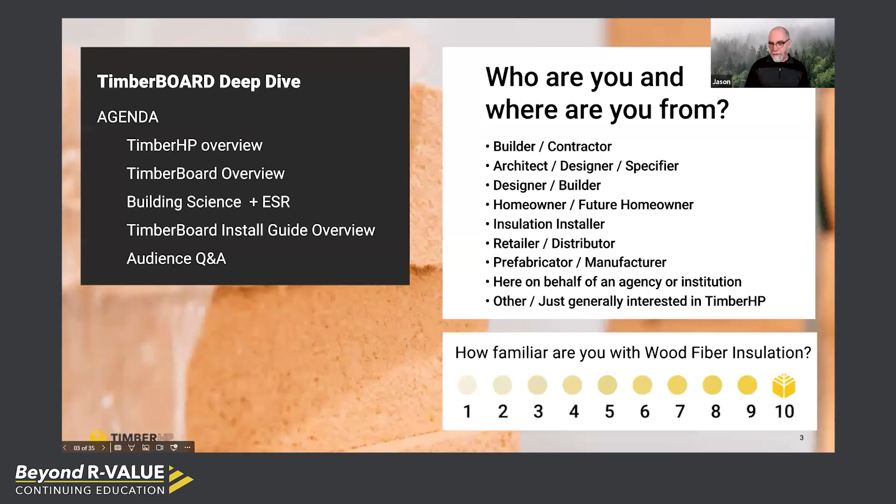Again, thanks everyone for joining us. Let's talk real quick, high level, about what TimberHP is as a company. I think a lot of you are probably familiar with us already, been following us along this ride, may, as Edith suggested, know quite a bit about our product, and welcome those questions and comments.

As we go through Timber HP, we often get asked what that HP means, and I see this as the support, the foundation, the three-legged stool of timber: high performance, healthy planet, healthy people. Any one of these could take precedent over another depending on what a specifier is looking for, but they all have equal importance to us.

It might not be the highest of our values or the strongest of our strengths, but in our eyes high performance really does represent that and more. We call this series Beyond R-Value for good reasons, and we may dabble into those beyond-R-value benefits of the product. Certainly Healthy Planet—great place to live, in my opinion, and I like to keep it that way.

So Healthy Planet to us means due diligence, responsibility, and stewardship in our materials and in how we go about building and promoting building products in the industry. And healthy people—whether that's indoor air quality concerns or durability of the building envelope—the benefits, I think, are very clear. Vapor open assemblies do a lot more for not only the assemblies but also the occupants.

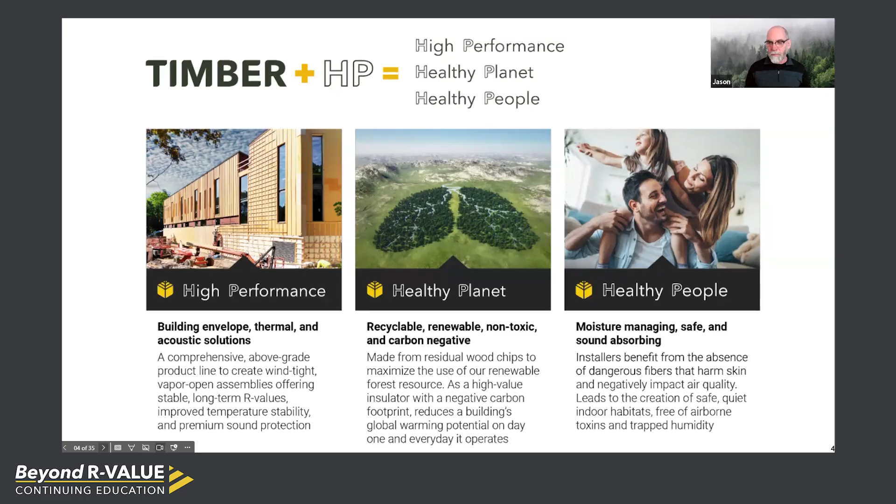So I'll get right into it. All of our product lines are based from the same raw materials. They all have an aspect that's carbon storing, high performance, and some recyclability. Not a lot of systems in place, but we do have some closed loops in our manufacturing facility to optimize the raw materials we use, and also look toward new opportunities in the field of maximizing building products, letting them roll into the next generation if that comes with deconstruction.

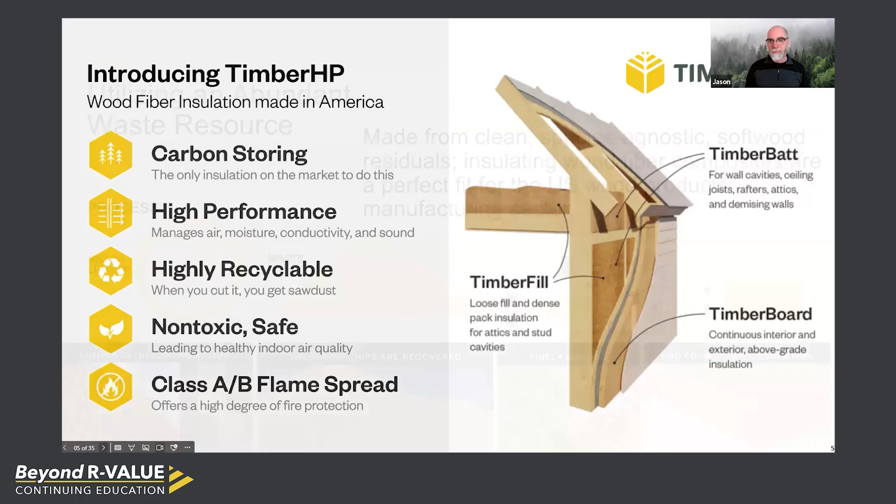Wood fiber—I mentioned the Healthy Planet, Healthy People component of this. We are primarily using residuals from another industry. We have a significant amount of that material mandated in the initial funding of this company, that we are using byproducts. We are a solid waste recovery facility, recycling facility to some degree, because we're using the material that hits the floor when you're knocking down a round log into rectangular boards.

There's a little bit that doesn't quite make the cut to the final product, and that material was a great resource for a lot of the paper industry in the great state of Maine—it was added revenue. Some have used it for biomass, but it went to paper, and we're stepping into the place that the paper void has left. We've lost a number of mills since the time we've actually been in production, and that has continued along the way.

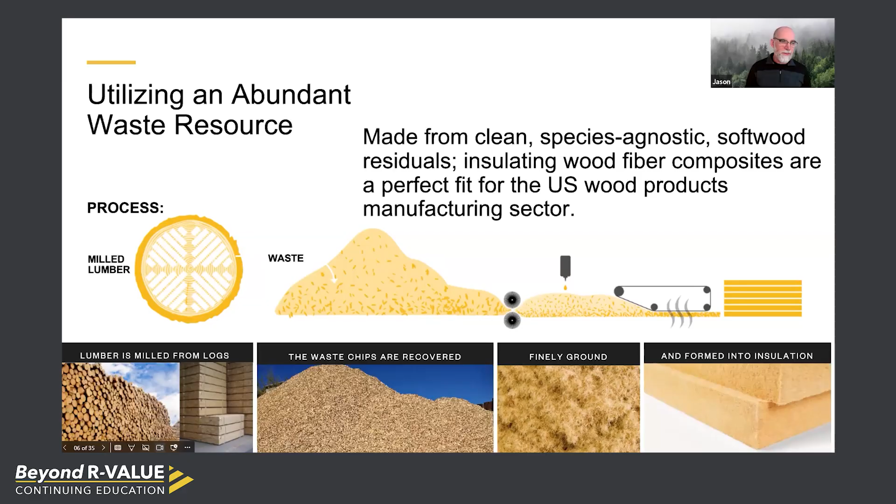But you can see the process flow here briefly—just looking at raw material, some binders, some processing, and in the end, a pretty good looking product, if you ask me. Slightly biased.

Before I pass this off to other folks on the call, just to touch on this: in our immediately addressable area, we consider wood fiber insulation—our strategy is to go to market with a price point comparable to a traditional newspaper-based cellulose product in the attic for Timber Fill, somewhere between foam and mineral wool when we talk about a board product, and somewhere between glass and mineral fiber batt when we talk about Timber Batt.

Different characteristics for each, and we'll really focus on TimberBoard on this call, and look forward to other opportunities in the future series where we get into other product lines and other points of discussion.

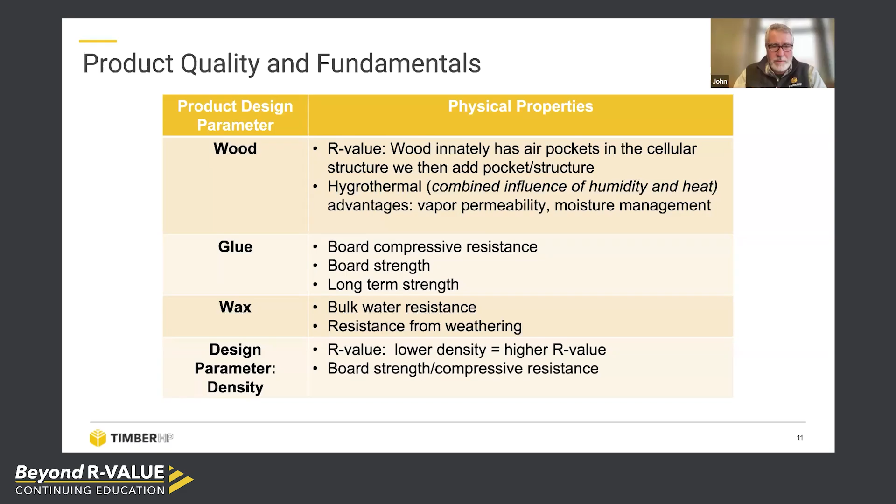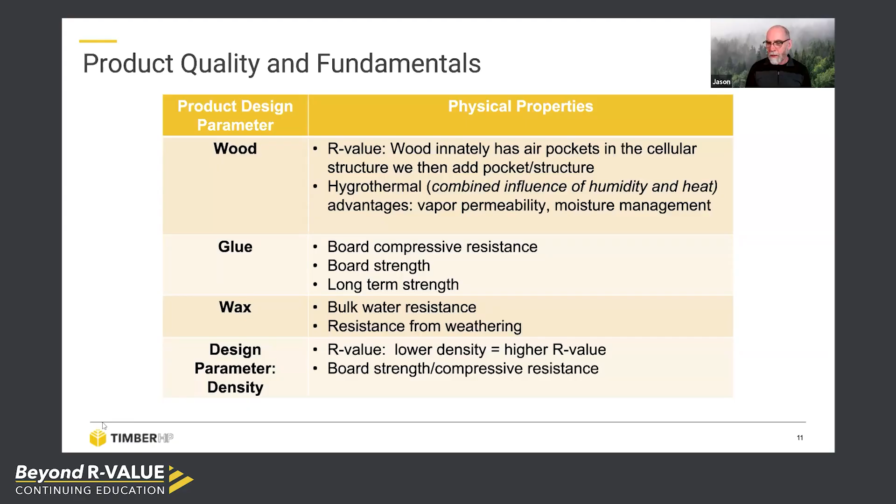I think folks may want to know a little bit more about some of the restrictions we have here. So we have an ESR, an evaluation service report, for TimberBoard, and our sizing thicknesses are 1.5 to 4 inches. But that doesn't mean that's where it ends - we do have some other thicknesses available outside of that evaluation report.

I also want to mention that bullet about the R value, which is comparable to some other products out there, certainly not the same R value as foam, but we're talking beyond R value in this presentation. It's always good to have a vapor permeable material on the outside so that when conditions allow - drier conditions outside in wintertime in this climate zone - any moisture in the assembly can dry outward and be evacuated from the wall assembly.

The high compressive strength bullet we see there is really convenient when doing vertical strapping or any kind of strapping on the outside of the building - it won't compress if you're overdriving the screw, and therefore it'll be easier to attach your cladding in a plumb, clean condition.

I think a lot of people on this chat. Go ahead, Jason, did you want to jump in?

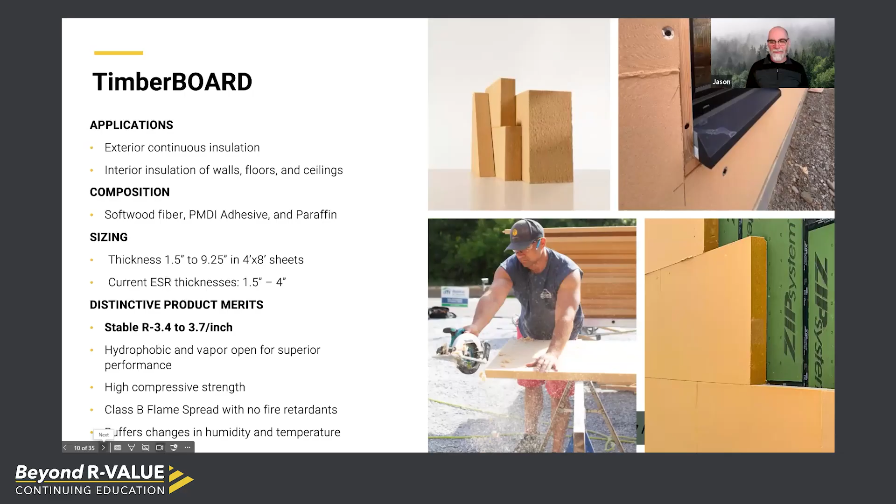No, continue please. I saw my friend Greg Smith in the chat, patiently waiting for Class A. That is in the cards this year, but right now the material is Class B rated and therefore appropriate for Type 5A construction - that's just with the board. Our other two products are Class A rated and can fill the void in cavity insulation and also for sound attenuation.

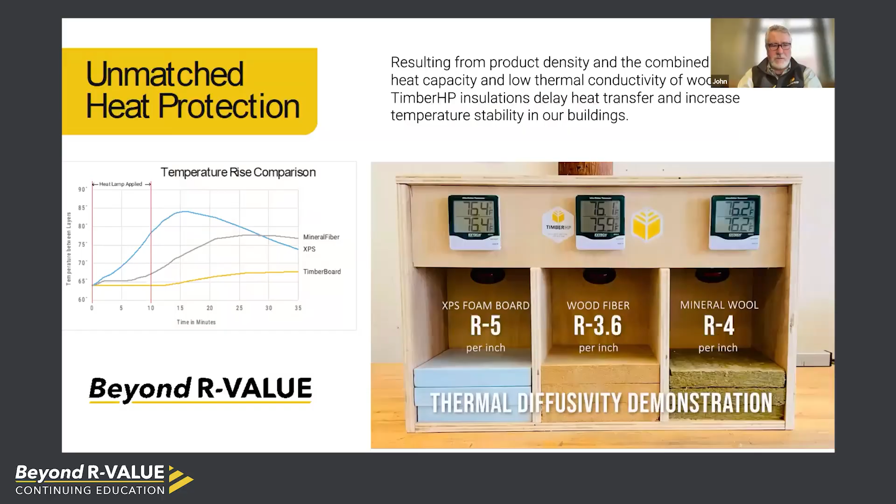You'll see, I think we're going to see a very interesting slide coming up about buffer changes in temperature and humidity. We'll get to that shortly. I'm fascinated by this because the codes only deal with R value and don't necessarily think about dynamic performance. What you're seeing here is a time lapse of a 10-minute segment - that's the x-axis on the graph to the left - showing what happens when you bombard the outside of the insulation with heat lamp temperature simulating sunlight.

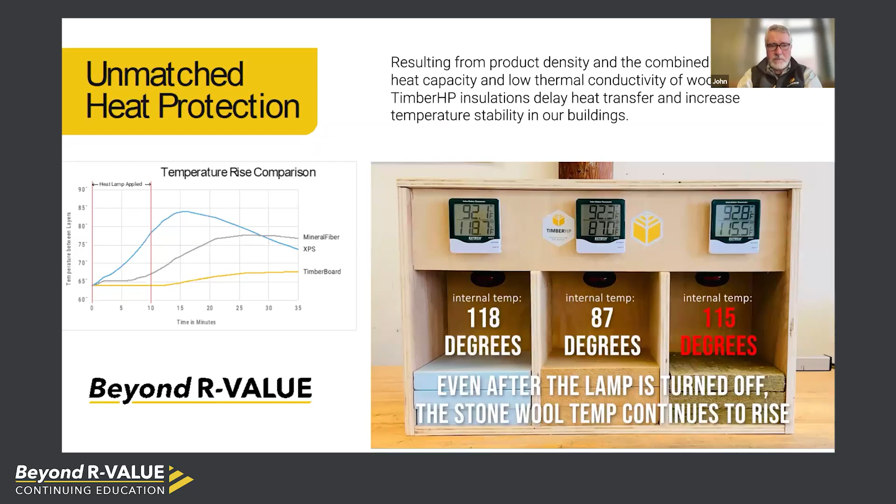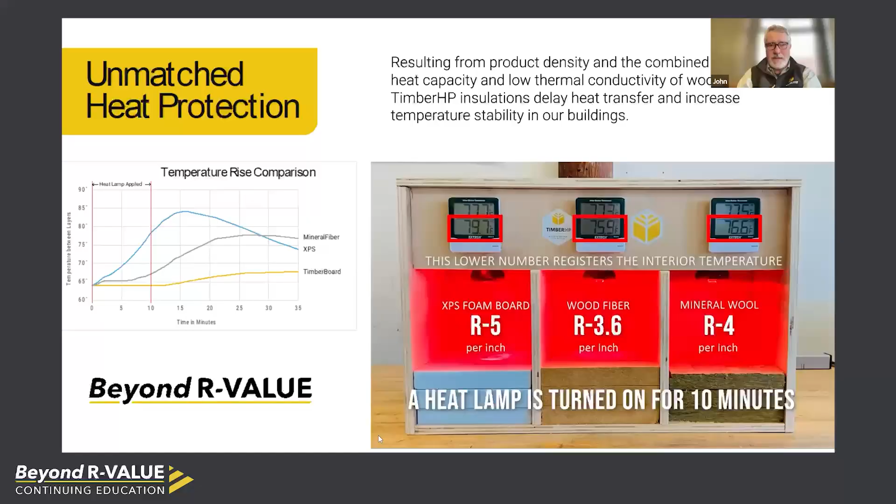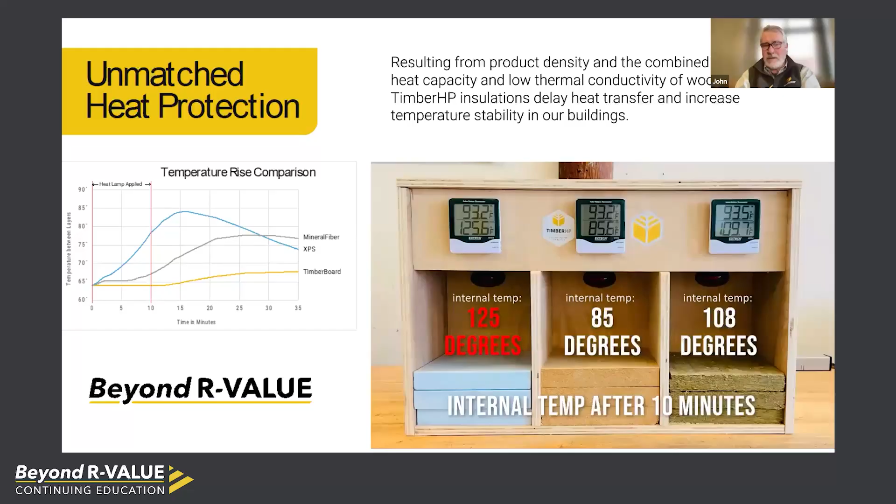Look what's happening in the center, where the temperature sensor is located in the insulation assembly. The temperature at the arguably poorest R-value is lower than the temperatures of materials with much higher R-values. That's very compelling—if you have a daily cycle with bombarding sun for a certain amount of time and then nightfall, you're never going to have that heat marching through the assembly. That's terrifically exciting and something we don't really think about.

I think it's great that it's the combination of the density of the material and its heat capacity—that's a real critical thing. Wood has a wonderful high heat capacity. Another way of looking at this in layman's terms: picking up a stone that's been sitting in the sun versus a stick. That stone has got great density, but it's very open to receiving that heat, unlike a wood product, which has the capacity to slow things down.

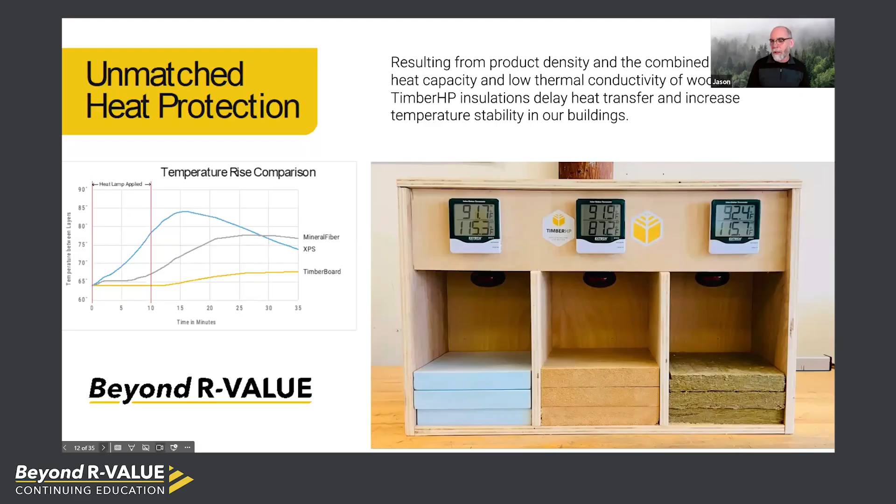There's another parallel conversation starting in some early research when we talk about moisture. The next slide shows early test data from University of Maine, Forest Product Lab. This is the relative humidity of board attached to a structure submitted to a very intense rain over a 12-hour period. The assembly on the left is TimberBoard mechanically attached to CLT, and on the right is something similar but with EPS.

I'll take over here—this one's near and dear and fascinating to me. The drying period is what we're really trying to point out. There's a spike on the left-hand side in relative humidity as it hits that outermost structure of the board, then a pretty rapid drying once the rain turns off. You don't get that drying effect or the mechanical capillary movement of moisture and buffering on the other side. There's a slight rise on the left as it moves through other layers of the board, but it really holds that moisture for twenty-some-odd days in the foam product—not necessarily harmful to the foam itself, but certainly would be to structure associated with it.

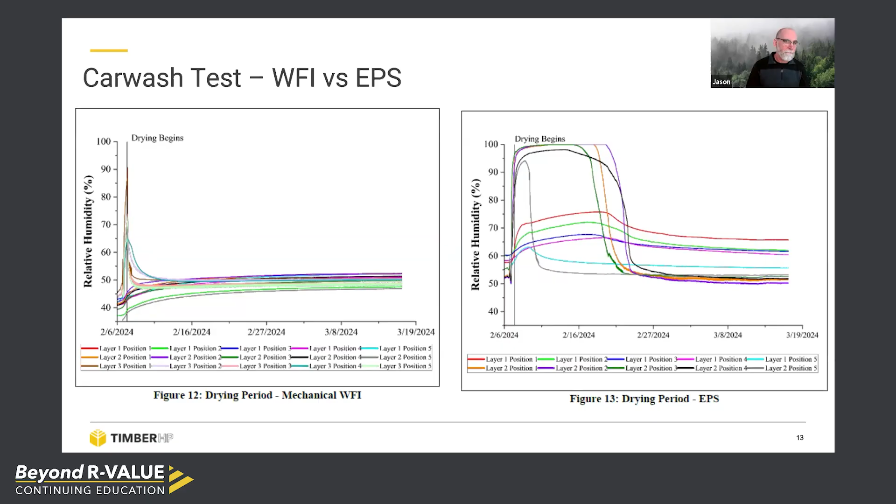I think we've got another side-by-side comparison. John, you got more to add on this slide? Well, it depends on what people are particularly interested in, whether it's the R-value or permeance and all that.

But the thing that my eye is really drawn to is the sustainability. When you look at the fact that you are sequestering carbon by reusing wood and not burning it, but actually forming it into something that goes into a building that can be recycled, the difference in carbon stored versus carbon used between TimberBoard and all other insulation products on this list is extraordinary.

In the luncheon presentation I give, we talk about a 1,500 square foot passive house with 5.5-inch cavity insulation and, I believe, 5.5-inch exterior insulation—something on the order of 27,000 pounds of CO2 equivalent is saved in that assembly for a house of that size.

Extraordinary numbers as a result of the very little energy that goes into the creation of the product, in terms of oven temperatures and things like that, compared to, for example, what you need to do to melt rock and form it into fibrous material.

So I'm by no means an expert in the chemistry of all this. Jason, if you want to jump in to augment what I'm saying—I was just drawing attention to the sustainability aspect of it.

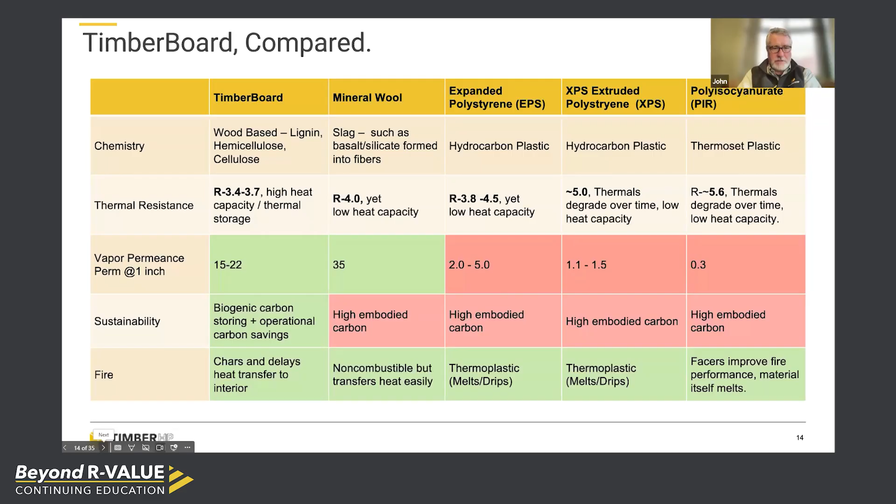I think a lot of people are comfortable and familiar with the fact that it's a vapor permeable and almost virtually airtight material. That's a quite safe choice at 15 to 22 perms per inch of thickness. That's another great quality relating to the chart shown earlier of the drying capacity of the material as it leaves. Yeah, I think there's a real great connection to it being a wood-based product.

We're reconfiguring it for sure—we are adding more to the TimberBoard. There has to be a binder, there has to be something that holds the batt together. But good, solid performance all around.

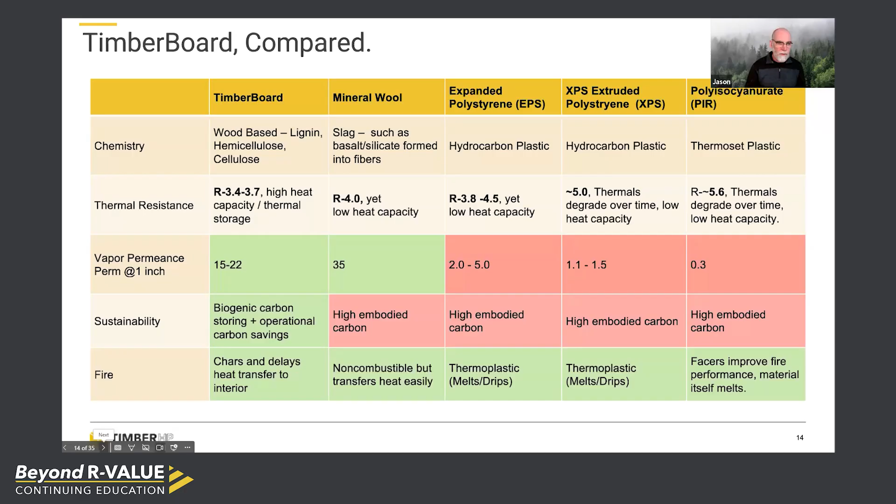John, I'm going to advance the slide and maybe we talk a little bit more about fire, that bottom row there, because this is also very compelling.

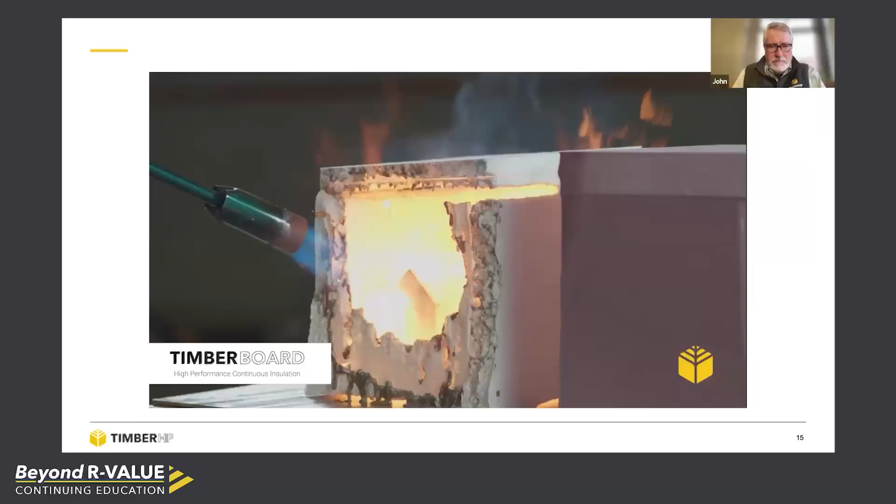Have a look at this, it's real time, is it not? Is there any editing into this slide? I think we did move through the foam ones a little quickly because they happen so fast.

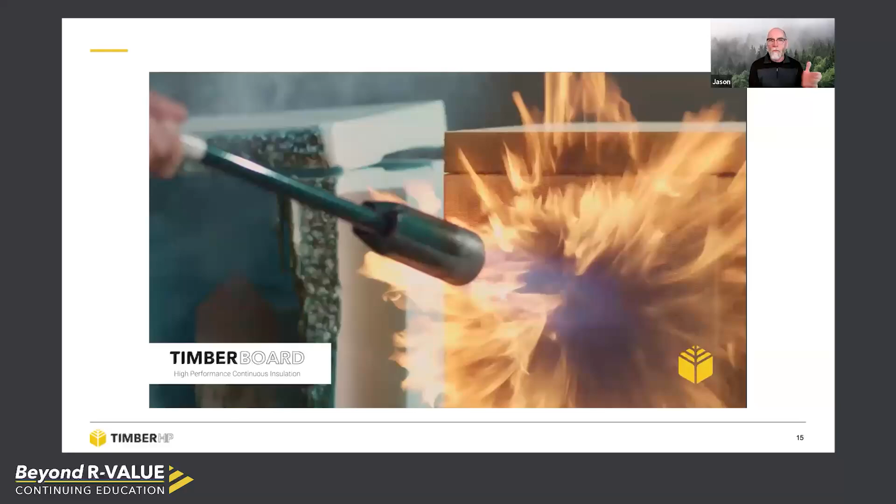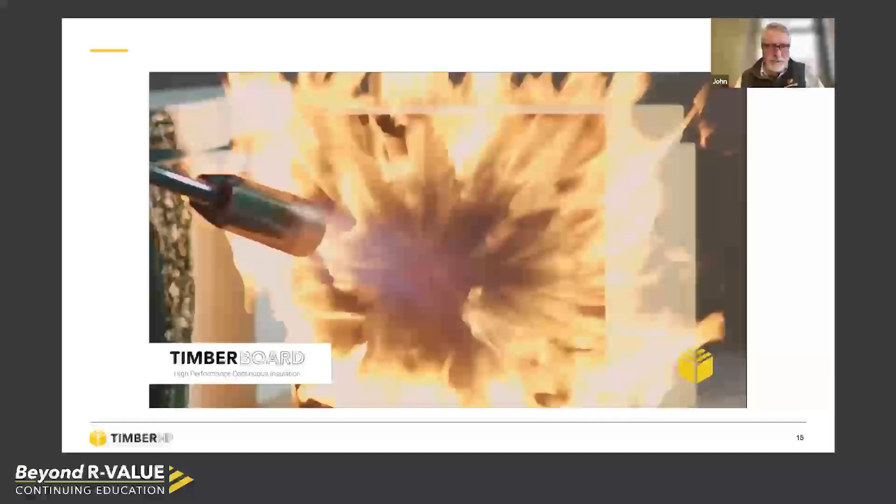We could sit here for quite a while and know that very little flame is generated. You see when the blowtorch goes off, because of that difficulty that thermal energy has getting through the product, you're safe inside. And we'll see our devoted Edith removing the shell of the building, and our little structure inside is safe and sound as a result.

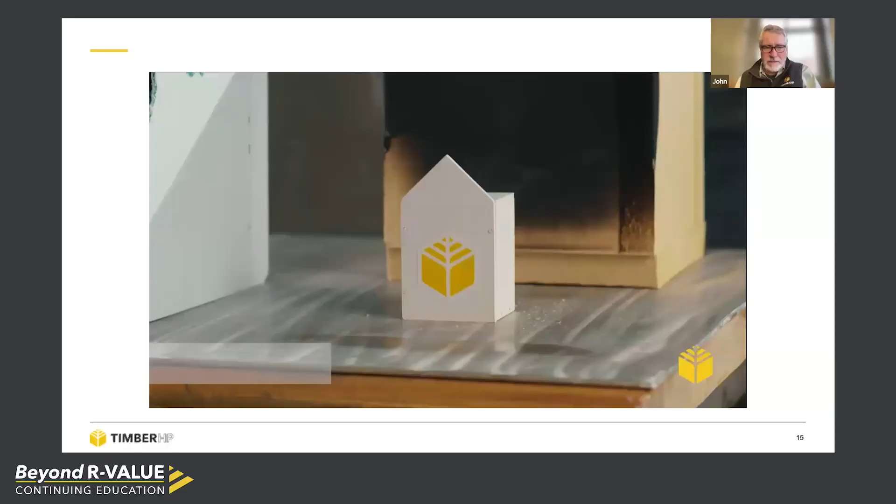Good stuff, you almost don't need to talk for this. Not to mention what is expelled when the combustion occurs, when foam burns, the horrific dioxins and things like that, or whatever goes into this. So, absolutely, yes.

I can defer to you. This is sort of the future state. We've spent a long time getting to this point. We've started from a product that has been in the market for well over 20, 25 years at this point in Europe. We've not innovated, this is translating to our market. And we are very excited to be looking at innovation and moving forward.

We're continuing to work through accelerated aging. I think we've seen really good results there, getting more data around compressive resistance and bond strength stability. But also air tightness, I'm not going to lay claims to air tightness yet because we haven't done that testing. It's underway now, but I feel pretty confident we're going to have some very impressive numbers there.

And we did have, as mentioned before in the ESR, a narrower scope. We're working on those thicker boards to get them into the evaluation service report, and also exploring increased fire resistance to get into other construction types.

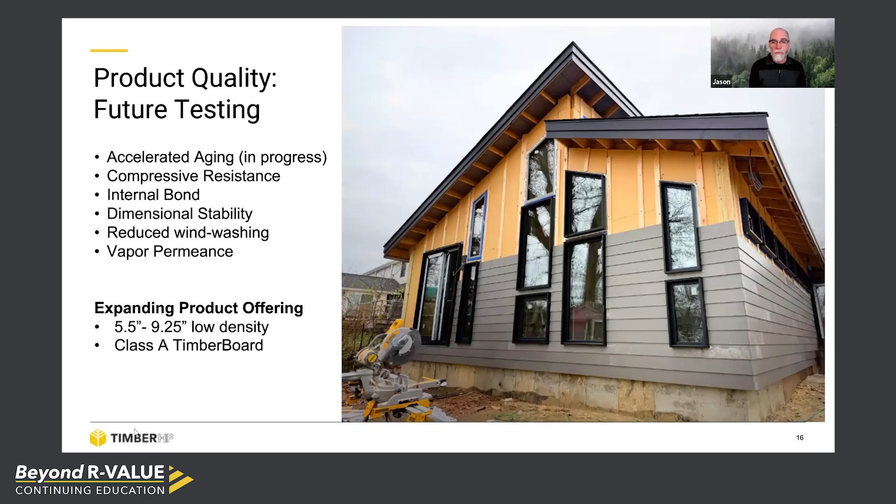We feel like that 1.5-inch board is sort of the threshold for most things. We have to mess with density a little bit just to make it a more stable, secure, durable product. So that is something for the future. We'll be working on these thicker grades first, making sure we get that all dialed in. And those are available now, just not on the ESR. The 1-inch board will probably follow.

Maybe a little bit about cutting. John, have you had field experience there? To be honest, not with TimberBoard specifically, I mean I've obviously manipulated samples of it. But whether you cut TimberBoard or timber batt, the only result is sawdust.

Last Friday, James, Ken and I worked on a Habitat for Humanity project with the Upper Valley Habitat folks, training them how to use it, which did not take long at all. All day, without gloves and without respirators, we worked with the products and there was no skin irritation. All there was, was sawdust. And admittedly, with 10 people cutting material and running around back and forth, there was a lot of sawdust, but nothing about it caused any irritation to me or anything like that, which is great. And regular tools are all you need to use.

Nothing super exotic. With thicker versions of the TimberBoard, like you see in one of the lower bullets, there's something called a Prazi beam cutter, which attaches to a circular saw. It looks like a hybrid chainsaw circular saw with a little guide to prevent binding behind it, but it's quite easy. It doesn't smoke or get hot, just keep your tools sharp like you should anyway. And it's just an easy installation.

Awesome, awesome. Look at Trevor McCabe's comment in the chat. That's great, electric chainsaws, yes. I've seen people gang cut rafter tails with chainsaws and attachments, the same thing would work. I'm not going to recommend that to anybody. Maybe anybody in the state of Maine probably can run a chainsaw since birth, but...

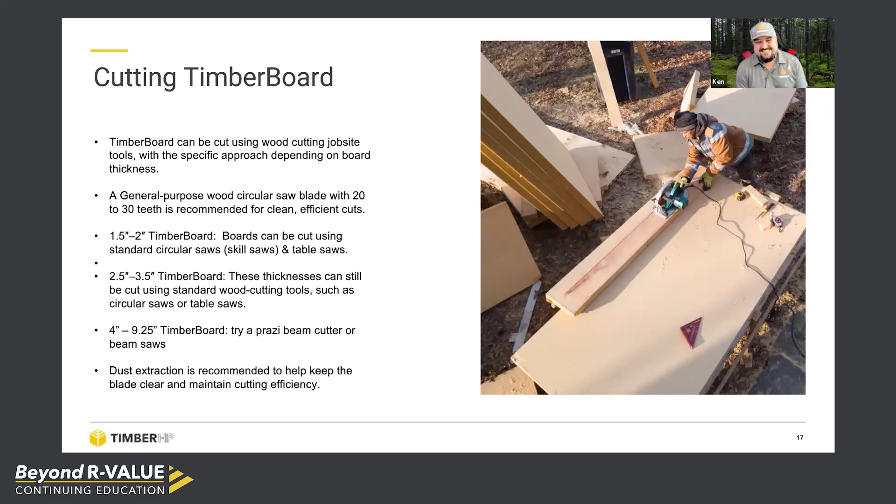Thanks a lot, John. I'm gonna move this over to another newer member, but also, are you the TimberBoard ninja now? Not sure. But we'll introduce Ken here and let him talk through some of the building science components and a little bit more about our ESR. Yeah, absolutely.

This material is so straightforward, and it's so wonderful to work with. To go back on what John was saying about cutting, I have a wood shop in my garage, and I've never had an issue cutting any of this stuff on any of my standard woodworking tools. Obviously, the thicker stuff needs a thicker saw, but when I'm cutting samples to take to meetings, my table saw does a great job, my bandsaw does a great job, my circular saw does too. I know the contractors out there are going to hate me when I say all my hand tools are Ryobi. They're not DeWalts, they're not Milwaukees. I like green, sorry.

Yeah, all of those handle it really, really well. And then when we're installing it on the walls, we've got to start thinking about control layers, right? So we've got our water control layer, what's going to be your WRB, your flashing, your cladding. I mean, those are the things that are keeping water out of your building.

And it's important, like John said earlier, TimberBoard has been treated with paraffin wax to help shed bulk water, and it's really, really good at it. It doesn't matter if it's the cut edge or the face, that paraffin wax is all the way through the product. The vapor management of the TimberBoard - it is a vapor open product. It's a wood-based product, and wood does a great job at handling water and vapor, diffusing it, distributing it, and letting it dry.

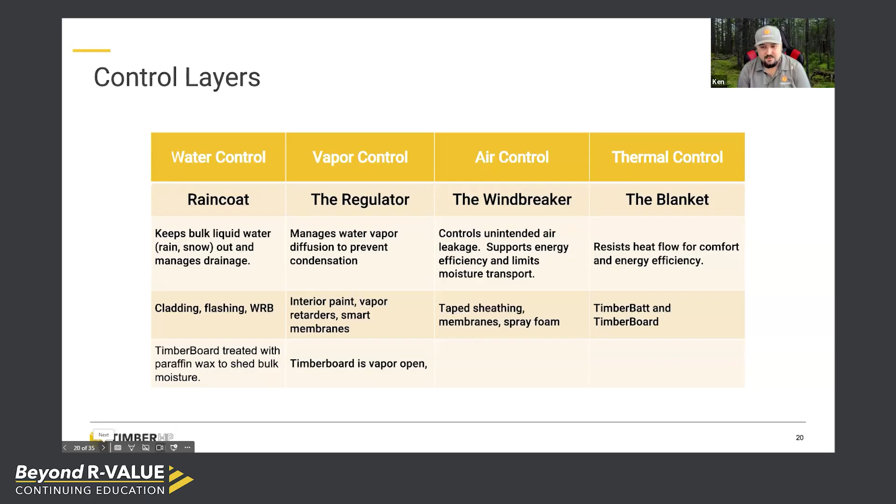So those thermal control layers in conjunction with the air control, vapor control, and water control just really, really give you a superiorly durable, comfortable, and resilient building, as far as making sure that you're warm, you're dry, you're not growing mold or mildew, and you're not rotting your building out.

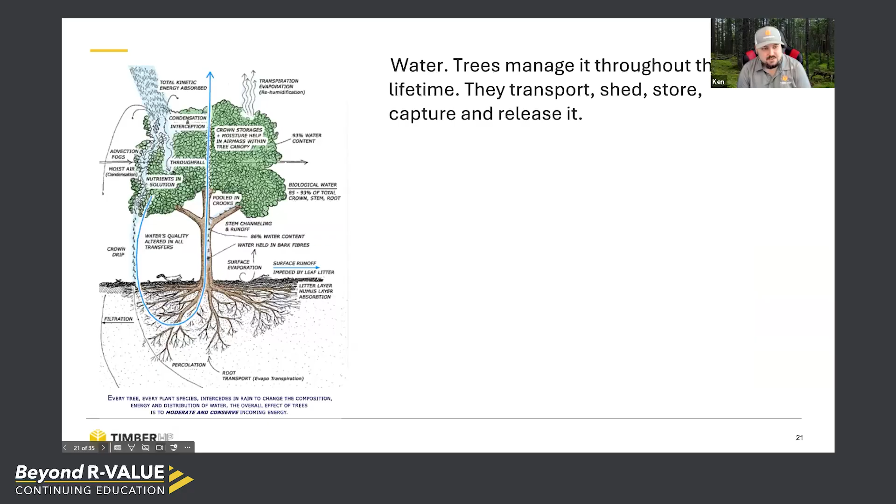And this is a quick little example of - this is a natural product, wood, trees grow all over the place, and they do a really, really great job at managing moisture. We're taking and cutting these up into smaller pieces, but the capillarity that transports that moisture from the hot, humid to the dry, cold is still in effect. Even though it's a smaller piece, we can get capillarity from one fiber to the next, even though we're rearranging those fibers. So our warm, humid air can work its way through our interior - not the air, but the warm humidity.

I don't know, I want to call it air, because if you've done a good job with your air barrier, water vapor is still going to make its way through your wall assembly in the direction it needs to, based on physics, which is from warm, humid to cold, dry. In most of everything above the Mason-Dixon line, this is going to happen more often from inside to outside. Then you get to about the middle of the country, and you might see a little bit more stagnation in which way it's moving, because it's a steadier climate. And then you get down to the far south, where it's way more hot and humid outside than inside, and you're going to see that vapor drive want to move inward.

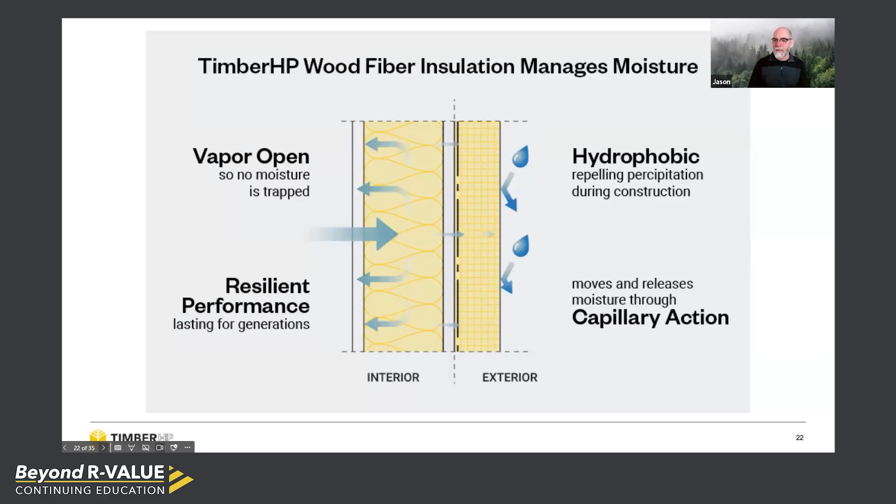We get a lot of questions around WRB and WRB placement? Maybe you could speak to that. I think you know a little bit about membranes and WRBs. Absolutely, I might know a thing or two about WRBs and where they go.

For us, we can do either one. You can put the WRB behind the board, which is the simplest location for a site-built project. So if you're working on site, detail the membrane behind the TimberBoard. Get that up on the wall, make it continuous and tight, get your windows taped in and everything like that. Then you can put the board on afterwards. So anything that gets between the seams of the board, any moisture that gets in there, you don't have to worry about taping or covering, because you have a great weather resistant barrier, air barrier behind it. That sequencing and detailing is much simpler in that location, and simplicity is the key to success. The simpler you make it for the crew on site, the more likely you are going to be successful in keeping water out of the building.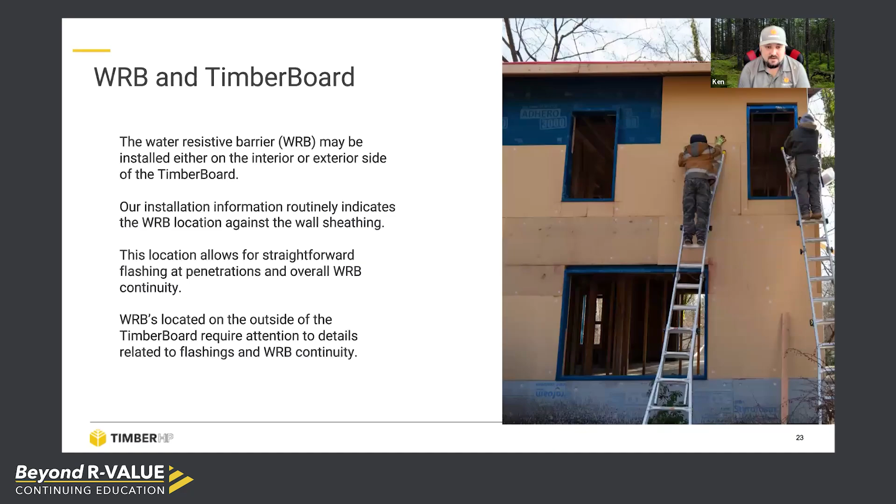Now, let's say on a systems built, prefab project, when you are bringing big panels out to site, it's really hard to tie those panels into each other if they're covered in TimberBoard or any exterior insulation, because it's covered. You can't make a really tight tie-in connection from one panel to the other without removing some material or leaving material off. So in that case, where it's much more controlled in a factory environment, to make the tie-ins from panel to panel easier, putting the WRB on after the TimberBoard can be more successful.

And now to get complicated, not keeping things simple, but maybe a couple of notes about our ESR, evaluation service report, and the limited thicknesses that we currently have. Yeah, absolutely. Right now, the ESR has been evaluated for sizes 1 inch, or 1.5 to 4 inches. Those come in half-inch increments.

The surface burning characteristics—I know Greg Smith is very excited for the Class A board. Currently, even without a borate for fire resistance, we're at Class B at a thickness of 4 inches. We have a flame spread index of 75, smoke developed index of 450, which is really great for a non-fire treated wood product. The product you saw in the video, it chars, and that char helps protect the wood from further burning. This is why, if you've ever seen the disaster at Notre Dame, a lot of the old timber managed to stay intact and not collapse, because it charred and protected the rest of the structure behind it.

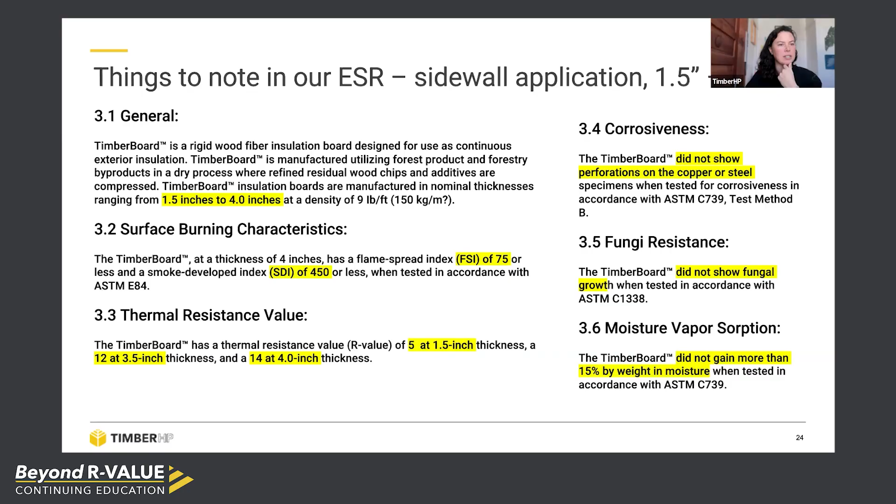Hey Ken, real quick before we move on, could we go back one slide? Do you have any UV considerations? And what if you have an open joint cladding? Is there exposure considerations we should know about?

I'll let Jason speak to the UV, since we have current testing that's just completed or just about completed on that. But if you're concerned with the looks, you will see it through an open joint facade. So personally, from an aesthetic standpoint, I would cover that in a black UV stable building wrap, just for aesthetics. But I'll let Jason answer a bit more about the testing we've done for UV on the board.

Yeah, and I think it's actually more than aesthetics. It's a durability concern. I'm not entirely concerned about it, but UV is an issue over time. It's only a surface issue though - UV will break down the glue bonds, and the fiber itself will yellow. That's about it, just like you'd see a pine board left in the sun. So that's not the big concern, but it's the bond break.

We typically see within a normal construction cycle no degradation. We're talking about 6 months on a sidewall, maybe less if it's in a roof application left exposed, just because it's more direct and there's potential for washing some of that fiber off. We've had customers that started with European products, built and manufactured the same way, where the construction cycle turned out to be more than a year left on the side of a house, and the board got a little fuzzy - that was about it. The fuzziness is the bond break, it's the fiber getting released, but we're talking about a millimeter or less. This is very much a superficial thing.

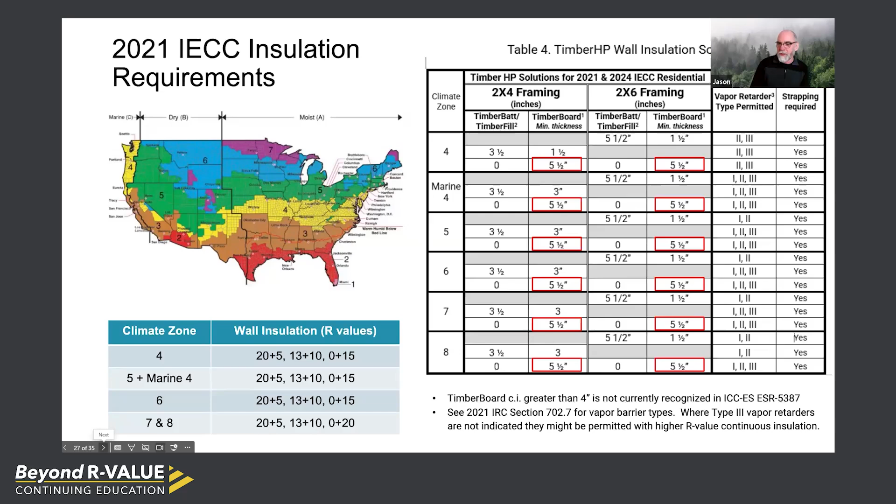Total R, required R value to code. Required R value really comes down to the ratios on each side of the wall to control the potential for condensing of that air-transported moisture from the cavity.

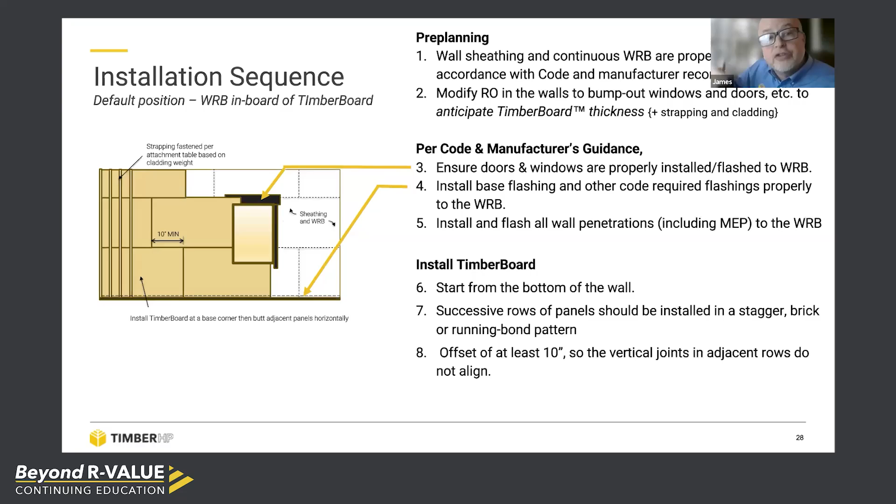The installation sequence is pretty straightforward, and you've heard this a couple of times. The key is pre-planning, particularly modifying your rough opening in the walls to bump out your windows and doors to anticipate that timber board thickness. If our thickness is going to be a little different than what you're accustomed to, you just have to account for that when you're purchasing your windows during that initial design.

Following suit, there was also a question about needing to do any sort of sealing of our product. The answer is that should be done prior to installation. You want to make sure the doors and windows, base flashing, and any other wall penetrations are all flashed back to the WRB. That is the first key step—have that shell, that WRB shell, at the point you should be installing the timber board.

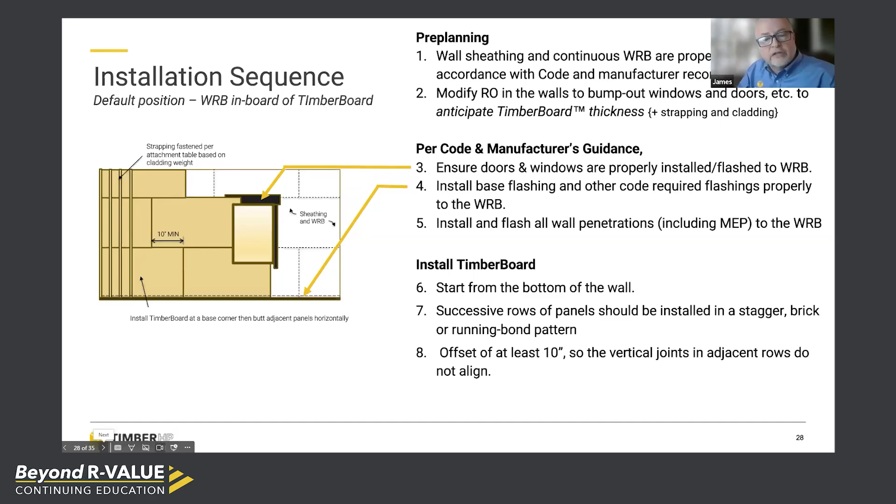Pretty straightforward: you start from the bottom of the wall, then have successive rows of panels in a staggered brick pattern. The key there is to make sure you offset at least 10 inches so your vertical joints in adjacent rows don't align.

This gets to a couple of questions. First, just to get the timber board on the wall, use some corrosion resistant nails or screws to fasten it through your structural sheathing on the wall, just enough to hold it in place. Typically that's about 4, and we do recommend a button or cap fastener. That was a question from Ross.

What's interesting is as you get to the thicker boards, like the 2-inch or 3-inch, they literally stack up like blocks. So the fasteners really just need to hold the board there long enough, because it's the straps that will do the true fastening of our timber board into the wall structure.

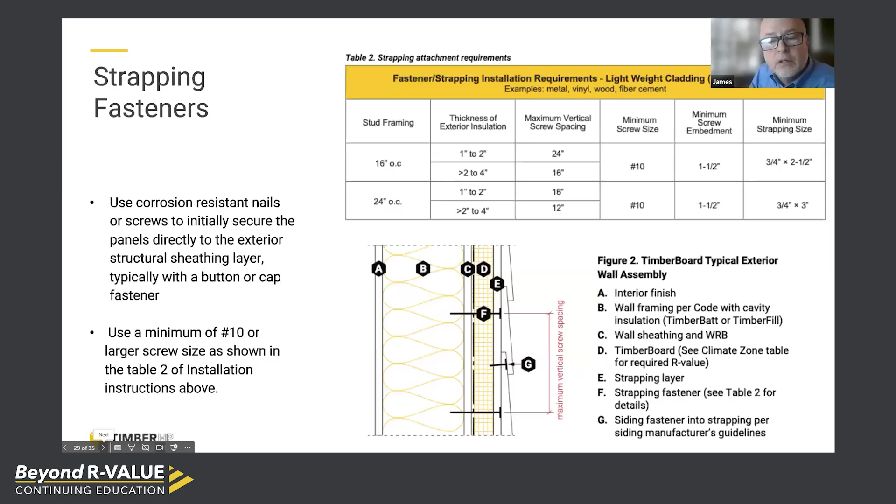One additional note: when you're installing around a window, get creative with the shapes so you're not breaking that air seal and thermal seal at the corners.

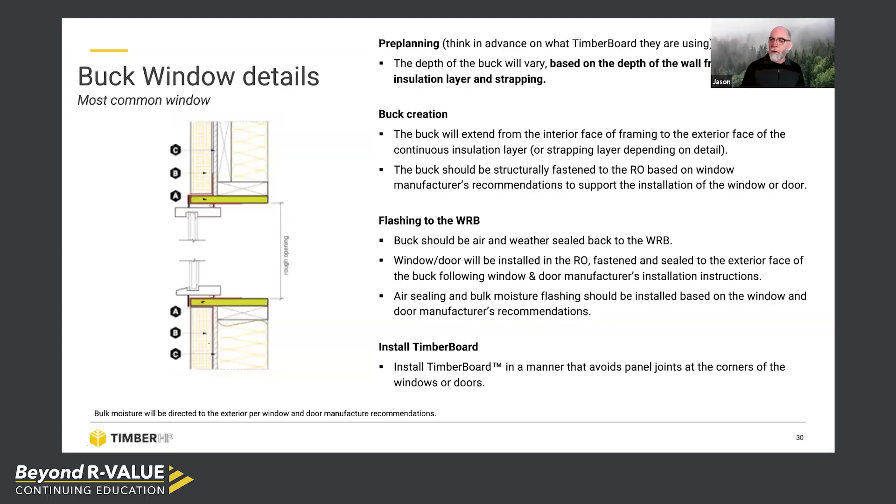Okay, clarify A being the location—A is the extension, it's a window buck extension. This could be full dimensional lumber, right, James? We could do this out of a 2x that's cut to the proper depth. It could be something that's not a bigger mass and a bigger thermal break, but it could be done out of plywood. There may be some commercial options as well to extend that window rough opening.

That's correct. Yeah, and I'll add that becomes very, very important, especially as the windows are mounted to the exterior, because if those windows need support, they need to have something to rest on. I've typically seen this most often out of 3/4 inch plywood or 3/4 inch Advantech sheathing.

But you also need, even if the window's set back, a nailing surface for your trim and finishes. So it's really helpful to go all the way around the window, whether it be after the window is in—you could put it flush with the sheathing, and picture frame this in 2x material. They don't necessarily need to be all the way back if you're not mounting the window to the far exterior. But basically it's support for the window if it's on the outside, or support for your finish and trim if the window is set inside that.

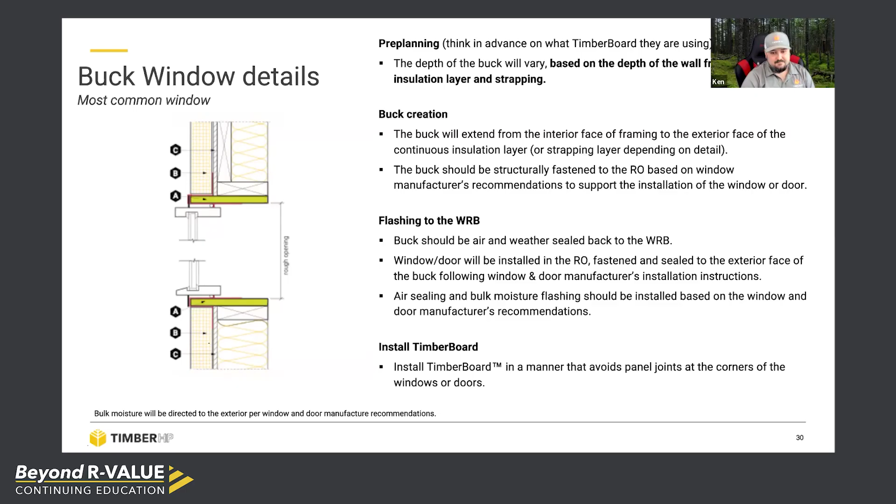We also have another million dollar question, and that is, Jason, would you speak a little bit to our plans for roof application guidance, and specifically, are we working with manufacturers that can provide a system warranty?

For us, we have a limited liability warranty on our product. It is baseline. We make it based on a quality assurance program, and we feel very confident that there shouldn't be any warranty claims based on that. But if there was, for some reason, that we did not produce it, internal bond or the strength of a part of the board, we don't currently have roof applications that managed to get into our ESR.

We're working on that as a next step. What we can provide right now are the technical details, the compressive strength, the dimensional stability, all of those things that an architect or engineer of record can use to talk with their AHJ, their code official, in order to add this to their project. I think it works well in roofs, and I think we'll have some good solid applications for you in the future.

But currently, because of the way we've gone to market without a standard to base this product on, there's a European standard for testing, but there hasn't been one here. We've had some limited movement with the Code Council. They're comfortable with exterior walls. We're working towards some large-scale fire testing and also the characteristics testing that will help us expand into the ESR. Reach out to us if you want technical information to help make that decision yourself. It doesn't compress easily, and I think it works well in that application.

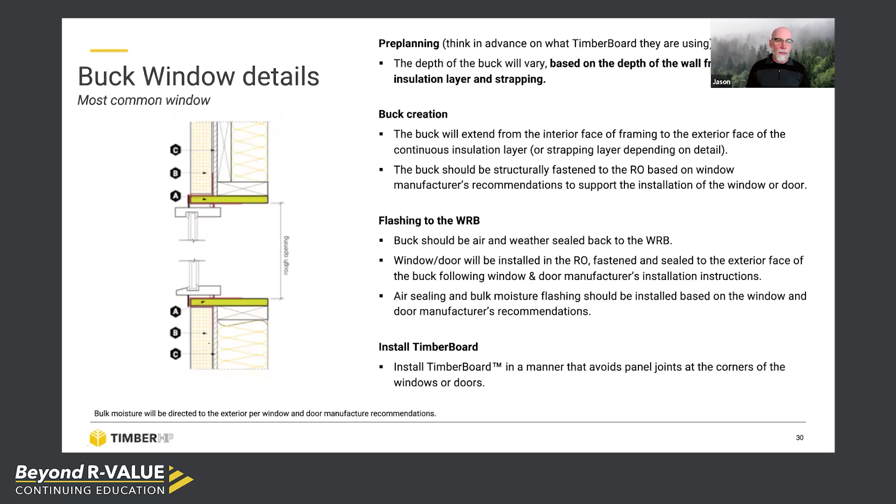We had a question about product availability, so I'll speak to that quickly. We are working with distributors and stocking dealers across the Northeast, so keep an eye out on our website. Up in the top right corner, you can find a button to find a dealer, so you can scope out the available lumber yards in your region. Please also note that we're actively adding to that list weekly. Right now our primary distribution is in the Northeast, and we're looking to expand that little by little over time.

And all three products are currently available: board, batt, and fill. I know everyone's super excited about the board.